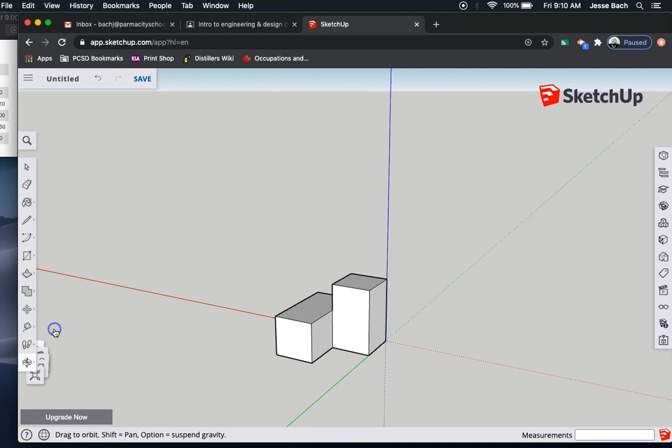This is really useful if you're doing any of your puzzle pieces, because once you figure out how to extrude two pieces together, you will know what's going on. So we're gonna go ahead and make something very similar to this today.

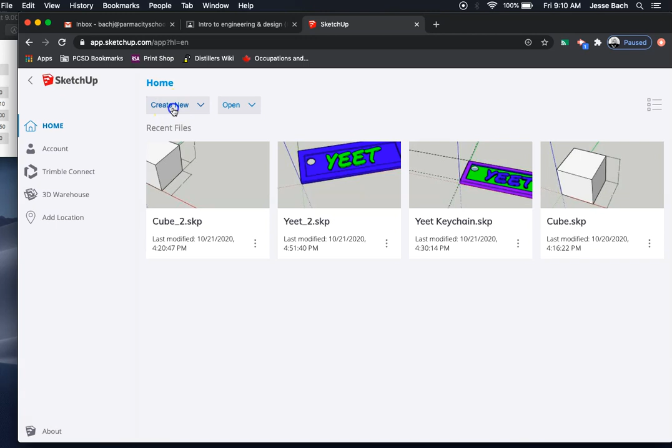I am going to go ahead and head to home, create new, and feet and inches. I don't want to save the changes right there. We will erase this nameless faceless person, and I am going to start with a rectangle. Start from the origin, draw it up and to the right, and now on my keyboard just enter 0.75, comma, then 0.75. Now I'm going to hit enter, and you're going to think this rectangle or square disappears, but it just happens to go very, very small.

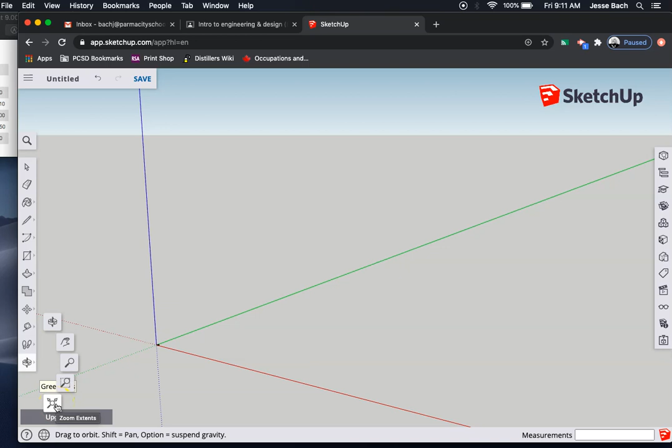Now to make this easier, I'm going to go down here and click on Zoom Extents, which is the magnifying glass with the three arrows. Click on that, and it brings me right there, and I can move it around.

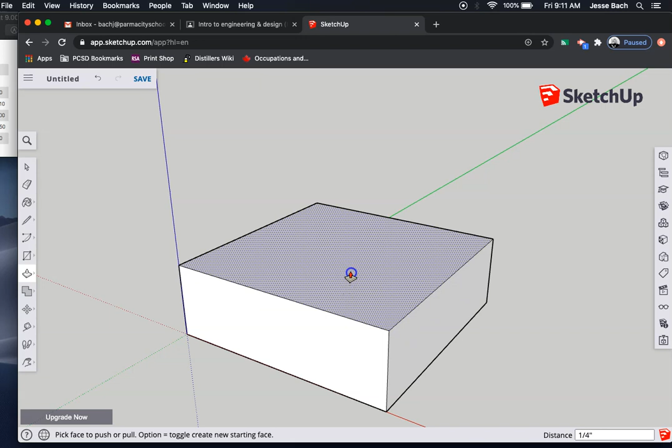Now I'm going to pan this slightly down, and I am going to pull this up right there, and if you look, the distance is changing. I'm going to change this to 1.5, so that'll be 1.5 inches, and it goes straight on up. Then right here, Zoom Extents, and you see that I've got a tower sticking right out there.

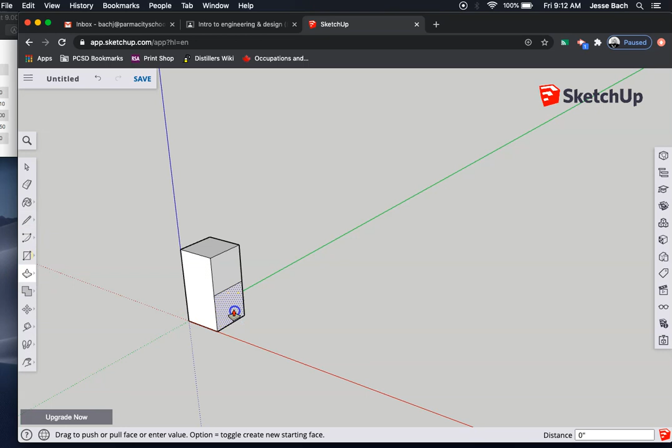Now one of our puzzle pieces has an extrusion coming here, so I am going to switch back to the rectangle tool, go from this corner up to the right, and you can see on the dimensions it's 3/4 by 3/4. Pull this out right there, and if you look at my distance, I want that 3/4 of an inch. So we're almost halfway there for a more complicated shape.

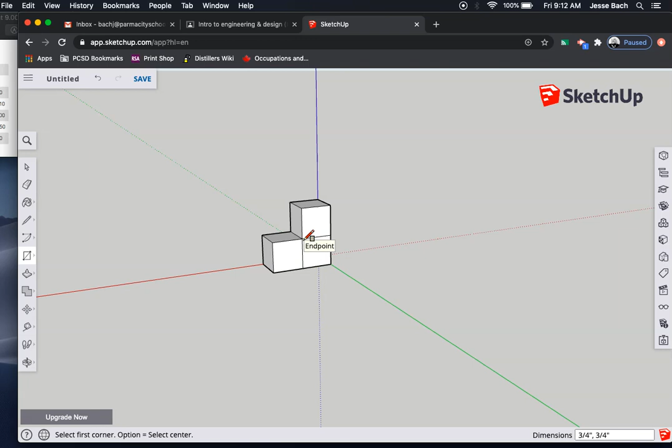I'm going to orbit this around. Head over to my rectangle tool, right there, up and to the right. You can see the dimensions are 3/4 by 3/4, and I am going to pull this out. If you look at the distance, 3/4 of an inch.

So that right there is how I can do a more complicated shape. Now let me play just for a second, because I know sometimes the shapes have cutouts, so let me just extend that out a little bit. Let's say I need to cut a notch in this top piece.

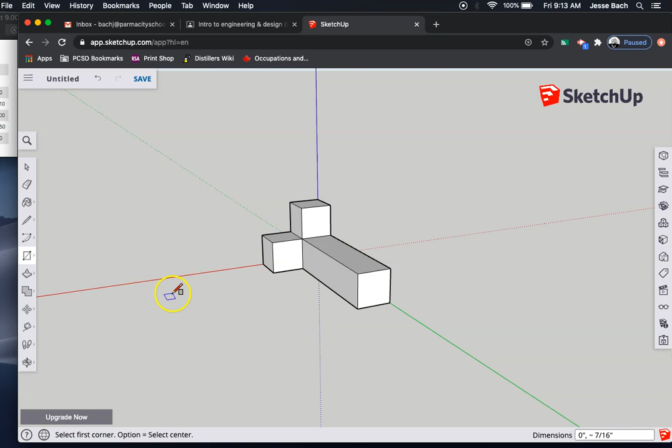I can also do that by drawing a rectangle wherever I have to draw it. Hang on, let me orbit this so I can show you a little bit better. So let's say I need a rectangle there, like a notch or a cutout. I can draw it wherever it has to go, and then I can extrude that in, just like that. So that's how you do a notch.

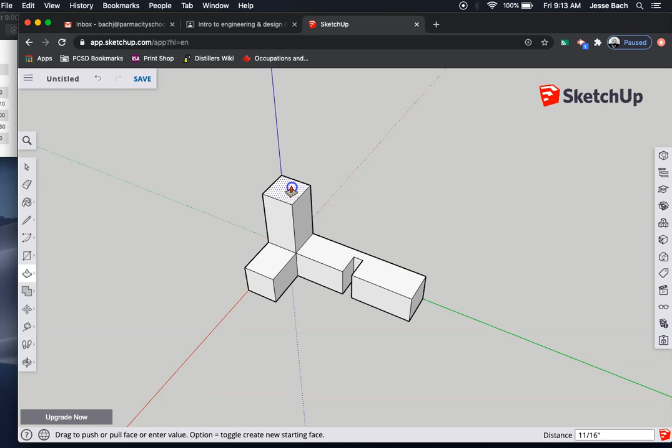So this is how you do a more complicated puzzle piece. It's actually not that difficult whatsoever. If you make a mistake, remember you can go in and out and change any of the dimensions right there. You might have to do a little bit of math on it, but it's not too bad. Okay, go ahead, stop this video, rewind, and replay as many times as you need in order to get the concept.